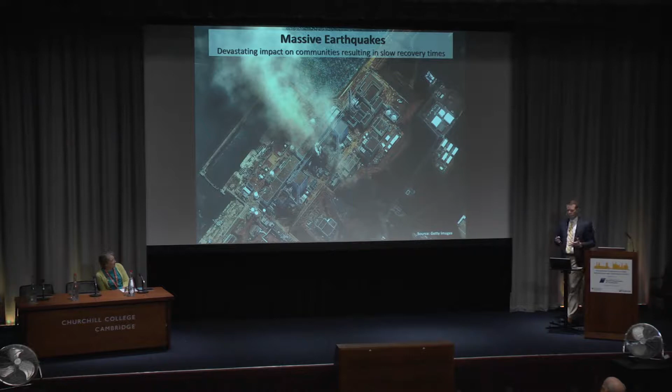We've seen a number of very large-scale earthquakes across the globe leading to massive destruction. Shown here is an example of the Tohoku earthquake in 2011, a 9.0 earthquake that led to a number of cascading failures—earthquake followed by tsunami breaching seawalls, leading to damage to a critical nuclear power facility that left some nuclear material to radiate from that facility.

This destructive earthquake led to over $200 billion worth of damage to the Japanese economy, underscoring the need to be resilient against these type of hazards.

Another example of hazards are tropical storms. This is actually the largest, most natural hazard that we see posed to our habitat across the globe, especially in the United States. Shown here is an example from last hurricane season, 2018, Hurricane Michael, which was a Category 5 hurricane that struck the northern coast of Florida, leading to massive destruction, really underscoring the need to be resilient against these type of hazards.

In the case of natural hazards like hurricanes, we're seeing an increasing number of hurricanes as well as increasing intensity posing threat to our habitat. If we look at just last year's hurricane season, we saw 15 named storms, 8 large storms, and 2 very large storms with destructive power like Hurricane Michael.

Other examples that introduce questions around resiliency for our habitat are things like climate change. Climate change is occurring, whether it's human-induced or not—it is definitely occurring and is projected to have increased global warming of upwards of 10 Fahrenheit degrees by the end of next century. We're also seeing increasing rising sea levels projected to increase 1 to 4 feet by the end of the century, and we're seeing dramatic shift in the availability of water across the globe.

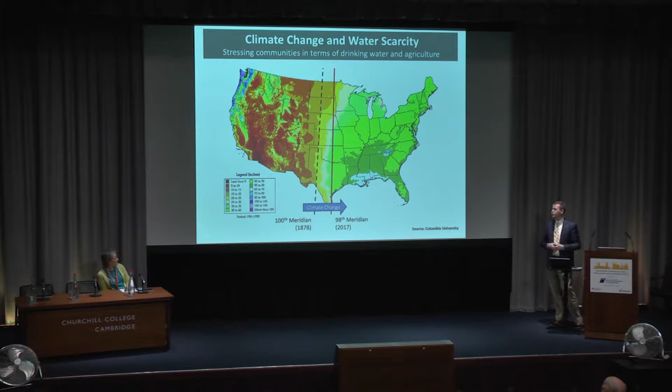But due to climate change since that time, that meridian's actually moved over about 140 miles. Today the demarcation in the United States is the 98th meridian, meaning that 140 miles across from north to south in the United States has had dramatic change in the availability of water, which has profound impact on our agricultural industries. Again, that introduces resiliency concerns for our infrastructure, our food supply, as well as our water availability.

Other types of concerns associated with resiliency is our rapid urbanization across the globe. We're seeing, for example, a massive wave of urbanization that's led to now more than 50% of the world's population living in very large cities.

We have a large number of megacities of 10 million or more residents within a very confined area, increasing essentially the stakes when hazards occur because of the complexity of addressing natural hazards and man-made hazards in such dense urban areas. Another challenge associated with urbanization is the resiliency of our infrastructure.

In many mature economies, we're able to plan ahead and plan accordingly to be resilient against stressors. But in many emerging economies, we see that there's waves of chaotic growth that introduce a lot of vulnerabilities in their infrastructure and the ability to withstand stressors.

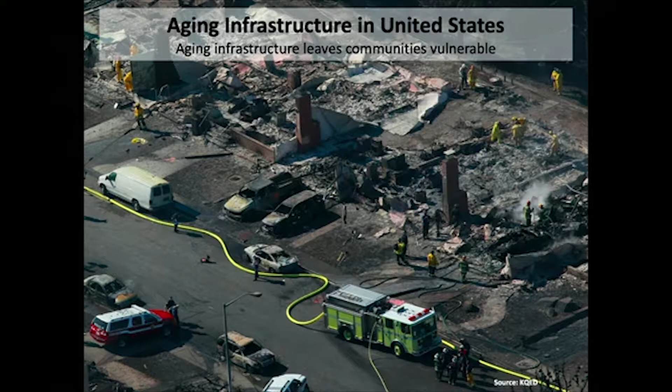Another challenge that introduces vulnerability in our infrastructure is aging infrastructure. For example, in the United States, most of our infrastructure was developed after World War II and is now approaching the end of their intended design lives. When we have essentially aging infrastructure, we have deterioration that can introduce weaknesses in those infrastructure.

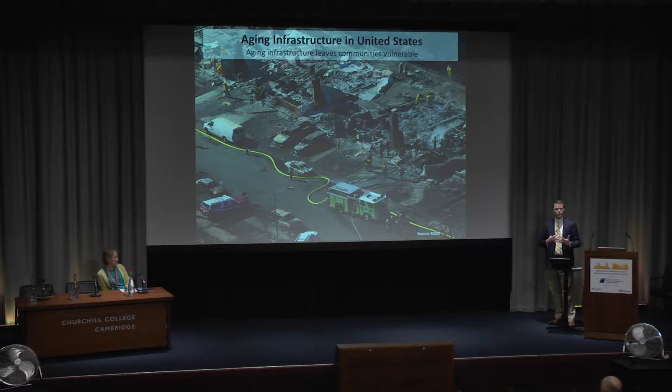An example shown here is the San Bruno pipeline gas failure, which occurred in 2010 in the San Francisco Bay Area. It was essentially undetected corrosion of a pressurized gas pipeline, leading to an explosion that destroyed a neighborhood in the San Francisco Bay Area, resulting in 8 fatalities. This introduces the risks that are evident when we don't address our aging infrastructure.

Other stressors can also be economic downturns. This is a big issue in the United States, particularly in the Midwest, where I come from, where we've seen a very dramatic change in the economic makeup of our local economies. We've shifted from essentially a manufacturing-based economy to one that is not, and that unfortunately has left a lot of people without available employment opportunities, leading to things like shrinking cities.

Now, when we think about resiliency, we can look at the definition of resiliency. For example, if I look at the dictionary, the definition of resiliency is the capacity to recover quickly from difficulties, toughness, essentially.

Now, from an engineering perspective, we often like to use functionality resilience curves to define and quantify our resiliency of our infrastructure. That particular performance curve typically is a time-based performance curve that's looking at performance before and after a disruptor event. So before the event, we may have normal performance. We have a disruptive event that can erode some performance metric that defines how our infrastructure is performing.

Over time, we can start to build back the capability of that infrastructure, leading to a recovery effort. That recovery effort can be delineated both short-term as well as long-term until we achieve full performance back after that particular event.

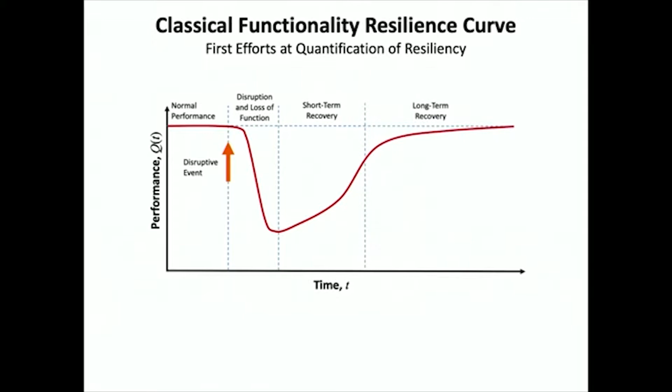Now, from an engineering perspective, we often like to look at the area that's underneath the curve off of essentially the normal performance level of 1. We typically will integrate that performance index, or 1 minus that performance curve, over the time period from the disruptor event to full recovery. That scalar is the way that we typically, or historically, would define resiliency.

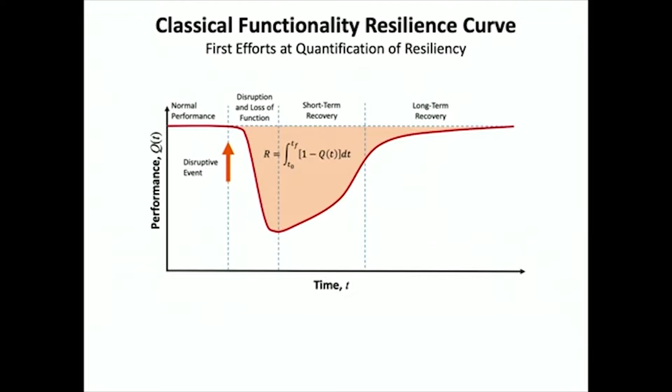But this particular approach to defining resiliency is potentially an oversimplification of a lot of competing and different dimensionalities that go into resiliency.

A broader definition of resiliency has been introduced by the National Infrastructure Advisory Council, which is an advisory council to the President of the United States, and is essentially congregated by the Department of Homeland Security. They define resilience along what they call 4 properties of resilience, and that includes robustness, rapidity, redundancy, and resourcefulness.

These 4 properties of resilience can be mapped onto 4 dimensions associated with resilience, ranging from technical, organizational, social, and economic. And they also explore the results of resilience.

Once we think about resilience among these 4 R's and in these 4 dimensions, what are the results? That can be more reliability of our systems, whether they're physical systems or human systems, lower consequences of stressor events, and faster recovery time periods, which is really the long-term aim of being resilient, is to be able to recover more quickly.

Now, if we think about the 4 dimensions of resilience - technical, organizational, social, and economic - as well as the 4 properties of resilience, which is a way that we can begin to objectify measures of resiliency, we see tremendous opportunity for smart city technologies that can come in and provide the data and information necessary to drive these type of analyses.

So by broadening the definition of resilience and looking at different dimensions and different properties of resiliency, we can more richly define what resilience is for our society and think about community resiliency along these dimensions and the appropriate approaches to sensing and actuating our infrastructure and societal systems to be more resilient along these properties and dimensions.

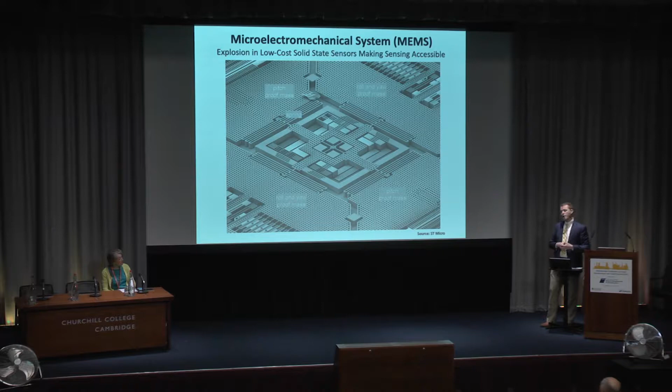We've also seen, from the 1960s to the modern day, a revolution in sensing technologies born out of technologies like MEMS, micro-electromechanical systems, where we've used integrated circuit technologies to build sensors. The benefit is that we can build sensors using batch fabrication methods, driving down their cost and size to miniaturized levels. Shown here is a MEMS-based accelerometer, a mainstay sensor technology today within the infrastructure space.

We've also seen, due to the emergence of technologies like CCD, a proliferation of cameras in our society. This is actually one of the most widely distributed sensors within the built environment. For example, here in the United Kingdom, it's one of the largest distributed closed-circuit television networks in the world, with nearly 500,000 cameras in the London metropolitan area. In cities like New York City, we have over 15,000 CCTV cameras distributed throughout the city, providing true big data—massive amounts of data that's very rich in both context and availability over time.

The last technology that's converged, really changing the availability of sensing and actuation solutions for infrastructure, is the internet, one of the greatest technological achievements of the 20th century, because it's opened unprecedented connectivity across the globe between people, between machines, and between information brokers and information consumers.

Now, if we converge many of those technologies, we see the ability to apply them to drive resiliency in our infrastructure. One of the first examples of adopting sensing and actuation technologies to make infrastructure more resilient is the introduction of monitoring systems as well as control systems. There are many examples of this coming from the mid-1980s all the way to the modern day.

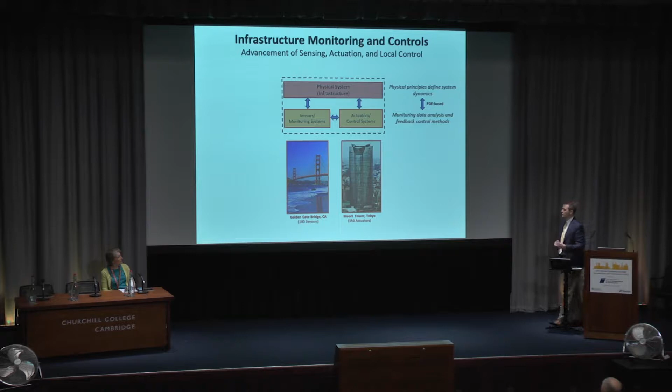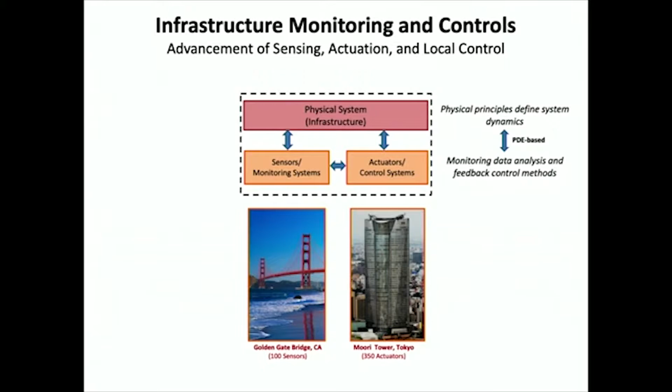We can also embed actuators in our infrastructure to allow it to react to stressors like earthquakes. An example would be the Mori Tower in Tokyo. This impressive structure in Roppongi has over 350 semi-hydraulic actuators—semi-active devices intended to limit deflections of the structure during typhoon winds, as well as small to moderate earthquakes.

Many of these different systems, whether monitoring or control systems, have largely been driven using physics-based approaches to our analysis, both in how we're interpreting the data collected and in the control laws being applied. These are largely partial differential equation approaches to using our data to understand performance as well as control.

More recently, because of the availability of the internet, we've seen a dramatic shift in our approaches to monitoring and control, best encapsulated through the emergence of what are called cyber-physical systems. Cyber-physical systems are distinctly different from structural monitoring and control systems because of the internet and the availability of computing power, which gives us scalable, on-demand computing capabilities, driving the adoption of new types of approaches to interpreting our data.

This goes beyond differential equation-based physical methods to ones that are more data-driven, based on concepts like machine learning, among other approaches that give us the ability to process large tracts of data. We then use the interpretation of that data from our cloud-based analytics to drive our control solutions—whether through reconfiguration of the control system or a completely new control law dropped in based on the computing capabilities available in the cloud.

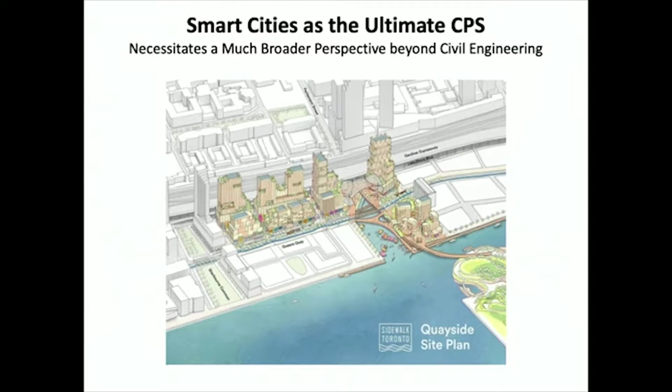The reason I like their particular approach to viewing smart cities is due to their interpretation of smart city services being layered on different functional layers. The layer we're perhaps most familiar with as civil engineers is the physical layer, which includes critical infrastructure systems like water delivery and energy systems, as well as buildings and built infrastructure we depend upon for our habitat.

We can introduce data and information through sensing and actuation technologies that drive the smartness of smart cities. That's something we've been exploring for many decades within our profession, whether through traditional monitoring and control systems or cyber-physical systems.

But really, smart cities go one step further, and it's the two other layers that I think are most interesting and important to highlight. One is an understanding of the resource flows that layer on top of our infrastructure systems. That could be energy, resources like nutrients, or things like finance—how money flows into projects, and how money is used as an actuation element to drive smart city development.

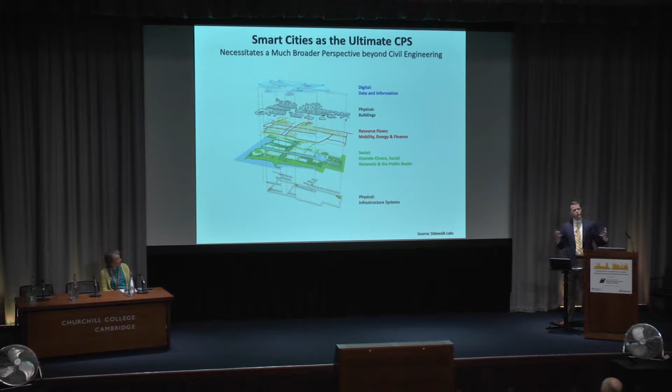The other layer is the social layer, ranging from the discrete choices of individuals within their society, to how individuals interact through social networks, to how individuals react and exist within the public realm. It's actually these two other layers that are the most critical aspects of smart cities, and they really push the limits of cyber-physical systems to go beyond just the physical to the social—so cyber-physical social systems.

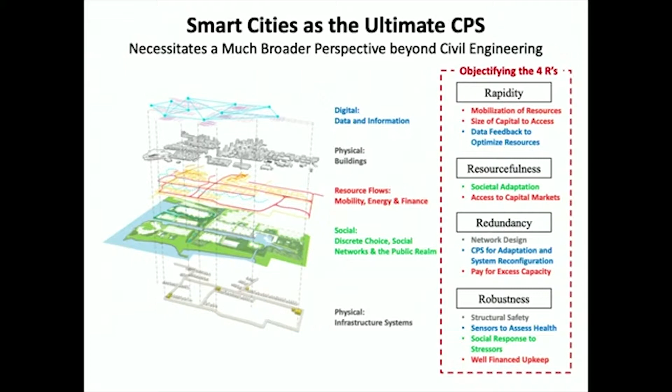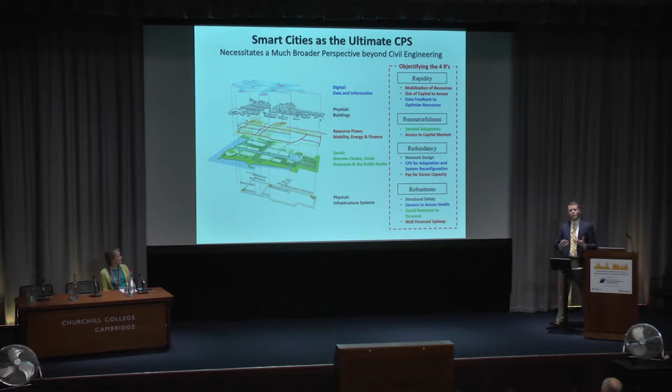If we think back to the four properties of resiliency I introduced from the National Advisory Board on Infrastructure—rapidity, resourcefulness, redundancy, and robustness—we see mappings of those layers as inputs associated with these four properties. We can think about robustness and redundancy, which often entail physical parameters, but also how we're monitoring, controlling, and financing those systems, along with social responses. When you think about resourcefulness and rapidity, we're thinking more about the social and resource flows necessary immediately after or before disasters to drive resiliency within our smart cities.

At the University of Michigan, we're exploring opportunities in the smart city space through a number of interrelated vehicles. Within our department, we've been looking at smart cities and cyber-physical systems as a mainstay technology for civil engineering, and we've been modifying our curriculum and research portfolio to be one of the driving forces in this space. We feel this is critical for the profession because we're beginning to see many other engineering disciplines coming in to define that space.

But we are uniquely qualified because we're a profession about the common good, and we want to leverage our experiences to really drive development within the smart city space. We're trying to do that through our education programs, and we also established an institute that cuts across our entire campus called the Urban Collaboratory, a forward-looking multidisciplinary research institute that works directly with cities.

So we essentially use what's called a city as a client model, where we go in and talk to cities and city stakeholders to identify challenges, then map those back as research problems that our researchers at the University of Michigan can help us solve and implement sustainable long-term solutions for those stakeholders.

The other center that we have is the Center for Smart Infrastructure Finance. The director is here today, Peter Adriaens. This center is really looking fundamentally to answer the question: who's going to pay for all this? I think that's a very important question that often gets overlooked, and it's really the distinct advantage we have as civil engineers to answer that question.

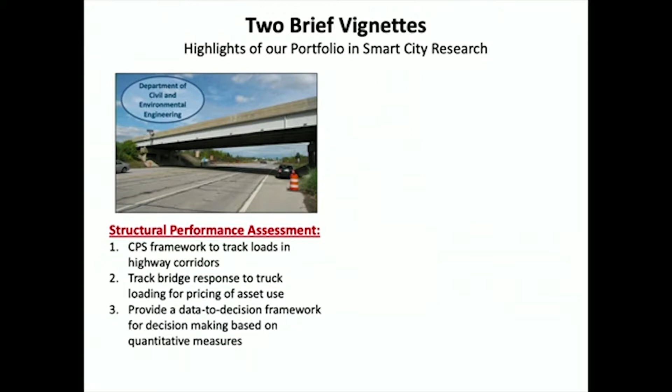The other example I'll highlight in today's presentation is the use of essentially looking at social systems within cities, and trying to democratize smart city sensing for populations that essentially want to monitor and understand some of the challenges they see in their community.

So let me begin with our first project. This project deploys a cyber-physical system on a 20-mile corridor we've instrumented close to our university in southeast Michigan: the I-275 corridor, which goes from the Ohio-Michigan border down by Toledo all the way up to the Detroit Metropolitan Airport. We have 4 bridges along that corridor carrying highway traffic, as well as cameras and a weigh-in-motion station. Today I'll largely focus on 2 of those bridges: the Telegraph Road Bridge, instrumented since 2010, and the Newburg Road Bridge, instrumented since 2016.

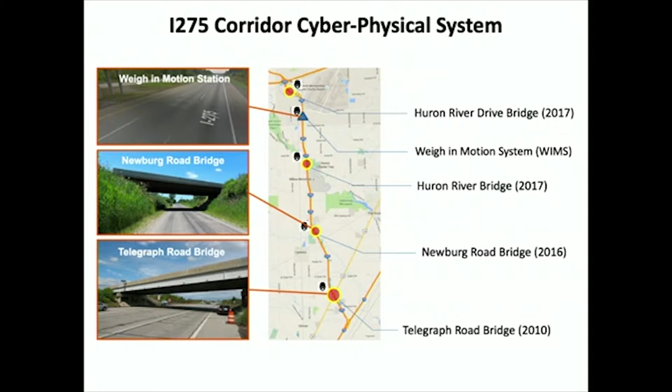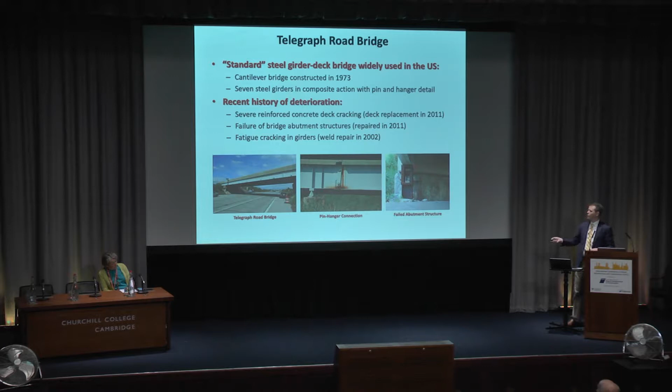The first bridge we instrumented is the Telegraph Road Bridge, a very traditional type of bridge seen in the United States—essentially a steel girder with a concrete deck on top. One unique structural characteristic of this structure is what's called a pin hanger connection, essentially a connection that moves the expansion joint away from the bearing, transferring the main span's loads off to wing spans that are supported in a cantilevered way by a pier structure.

This is a 40-year-old structure that has some deterioration quite common for a structure of that age, and it's being proactively addressed by the Michigan Department of Transportation. You'll see, for example, distress on an abutment structure leading to temporary shoring action on one of the steel girders, which has since been fixed.

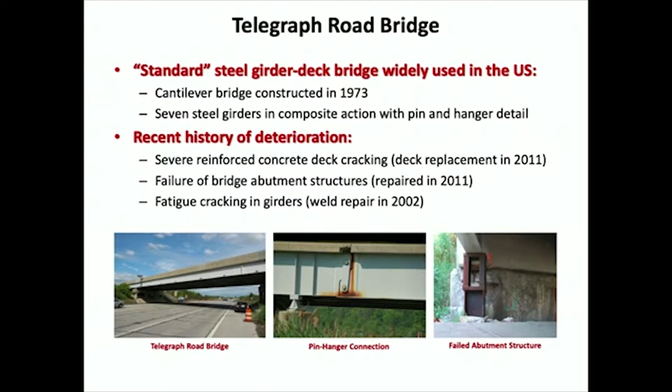We deployed in 2011 a network of wireless sensors that we developed in my laboratory over the years, called the Narada sensor node. It collects over 70 channels of data—not because we need all 70, but because it's a research project for us, and we're looking at different ways of processing data. So we have different types of sensors on that structure, looking at different response parameters, ranging from the vibration of the structure to its strain response.

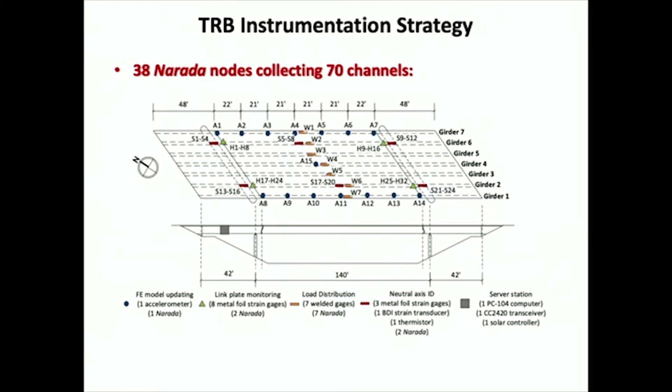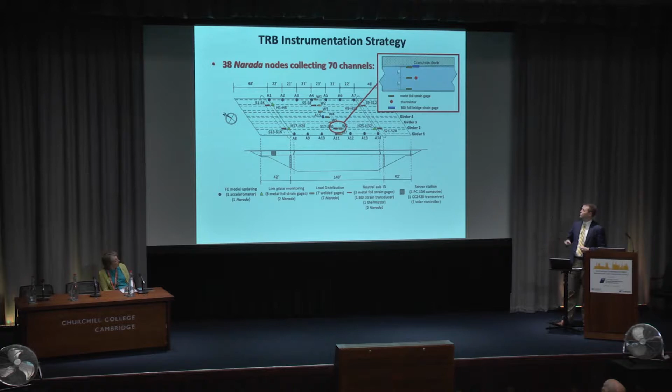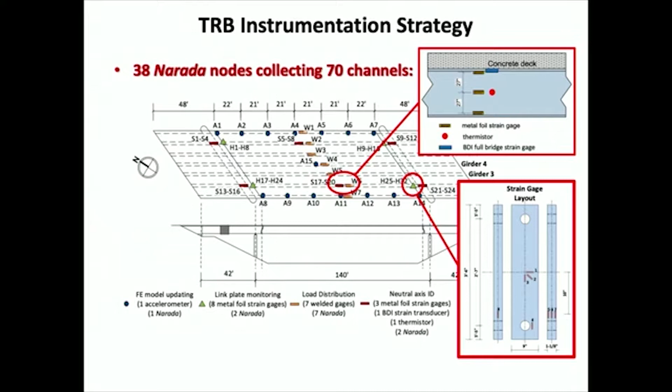For example, in our strain analysis, we look at the strain profile under flexural response of the structure using strain gauges and BDI bridge intelliducers that measure strain in the concrete of the deck. We also have pin hangers, one of the structural details of this bridge that's of primary concern to the owner, and we have a dense array of strain gauges on that particular hanger plate.

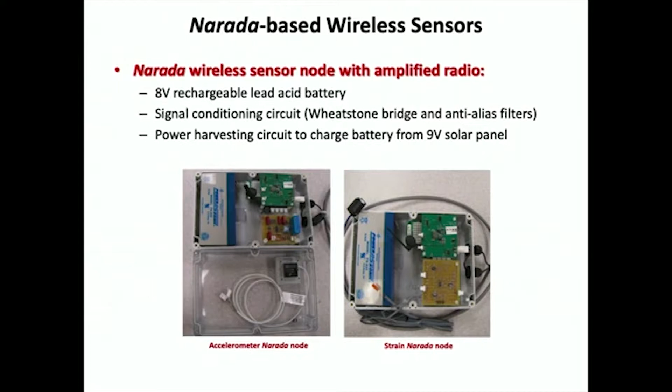Shown here is our deployed system. Again, we're using this Narada sensor node that we developed in 2005, but it maintains itself as a workhorse for the type of work I do in the field. This is just some evidence of how we essentially would deploy that particular system.

It's more than just a wireless sensor. It includes the ability to use solar power to essentially collect power and recharge batteries like lead-acid batteries, which are necessary for the type of climates that we work in Michigan. We have things such as shut-off circuits that essentially allow us to be very power efficient, so we're not constantly powering our sensors. We only power them when we need it, as well as signal conditioning board and different types of sensing transducers, including accelerometers and strain gauges.

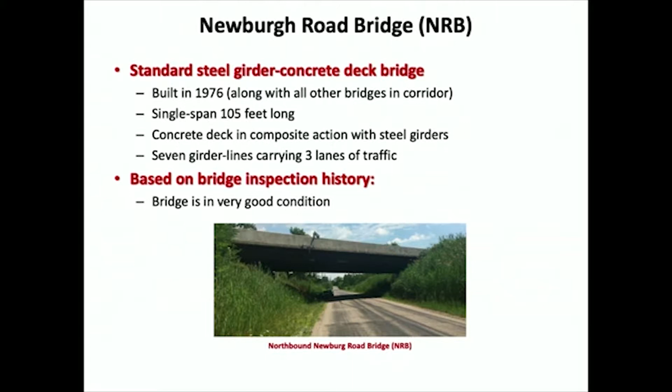The other bridge that we instrument is the Newburg Road Bridge, which is just a few miles north of the Telegraph Road Bridge. Again, very similar history to this particular structure. It's nearly 40 years old, a few years younger than the Telegraph Road Bridge. It does not have pin and hanger connections. It's a very standard single-span bridge structure. And we have a lighter array of 10 sensing channels on this particular structure that was deployed in 2016.

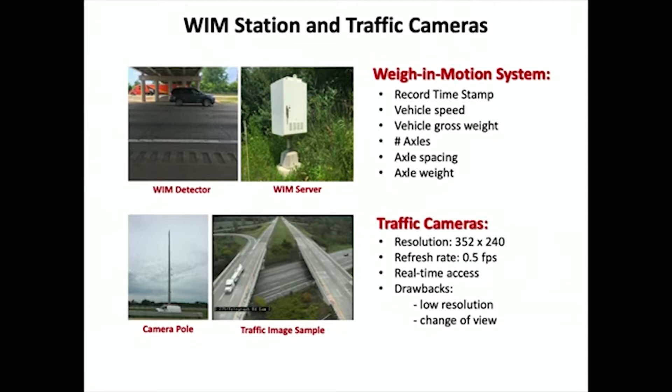In addition to our bridge monitoring systems, we have a weigh-in-motion station on that particular corridor that measures a number of parameters associated with the weightage of trucks that are going to be driving over those bridges. And we also have traffic cameras. You can see an example of the Michigan Department of Transportation's traffic cameras, but we've deployed our own that essentially have an embedded GPU that will allow us to do analytics directly at the point of data collection.

In this case, we're using a webcam that's going to monitor road traffic driving over our particular structures, and we'll embed detectors that allow us to detect real-time trucks as they're driving over our bridges and our weigh-in-motion station. Shown here are just some of the examples of the system deployed. Again, it's a solar-powered system, both our base station, which uses cellular communication to move data to the cloud, as well as our wireless sensor nodes, which are essentially using Zigbee protocols to move data to that base station, and then the corresponding camera system that's on the roadside of that particular structure.

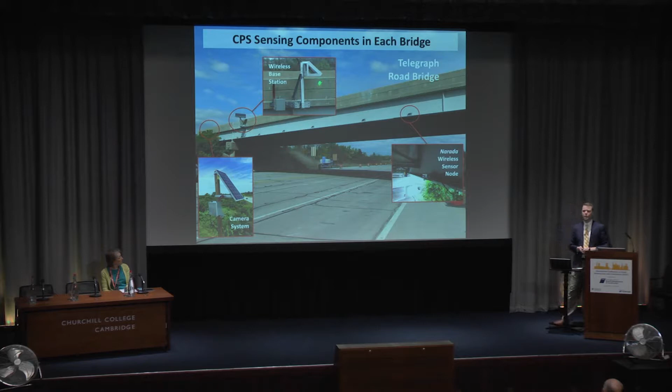And we have a camera at all of our bridges, as well as the weigh-in-motion station. We have one camera that's actually south of the system that's going to be a trigger to trigger our monitoring system. Once we collect that data, we'll push that data to the cloud.

So we've been collaborating with Professor Kincho Law's group at Stanford, who does a lot of work in engineering informatics and data models associated with how we store data. Once we collect our data at our sensor networks and our traffic data from our cameras, we move it to a cloud database that essentially is a NoSQL type database, giving us flexibility in the representation of that data within the database. So we're using Cassandra to essentially store that data, as well as to combine it with information associated with the structure using bridge information models, which is essentially a BIM type model that's specific to bridges and represents elements for bridges.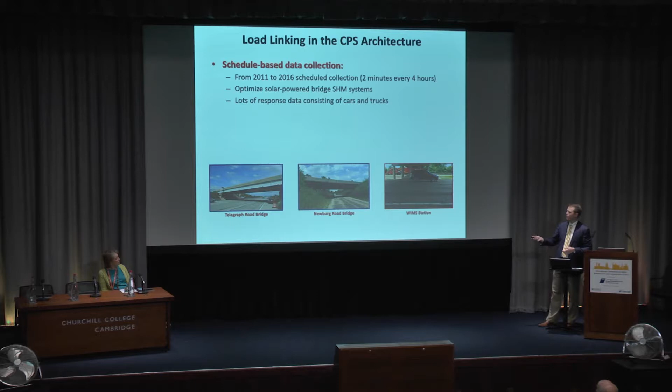Now, what we're interested in with the cyberphysical system is fundamentally to link loads to the bridges. So what we're trying to do is measure the response, or essentially the weight of trucks and cars that are in the corridor, to the structural responses we're measuring at our bridges. So we have our Telegraph Road Bridge and our Newburg Road Bridge. We're using detectors to detect trucks so that we can both trigger these systems but also to link loads. So we could look at correlation analyses of how one structure responds relative to another based on the identical load profile that we get by identification of the truck loads driving over our structures.

The way we do that is we have one camera that's right at the entry point of the northbound segment of I-275 that's essentially always on and is real-time detecting traffic load to detect trucks.

We're more interested in trucks because of the magnitude of load that they introduce within our bridges. So we have an embedded detector, embedded directly at the camera on a GPU, to detect trucks. Once that truck is detected, that trigger will signal the monitoring system, in this case the Telegraph Road Bridge, to collect data roughly 100 seconds after that trigger, assuming the truck is driving at 60 miles per hour.

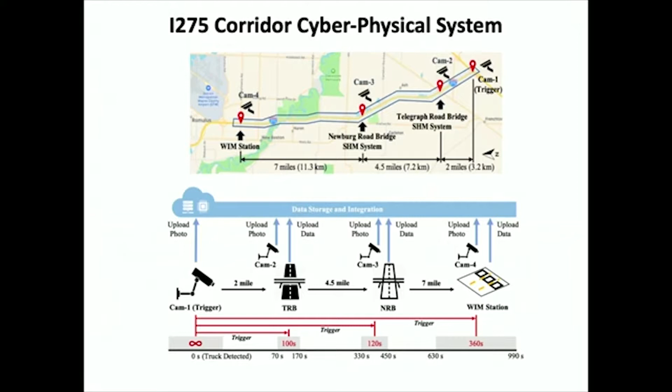We give it some margin so that if that speed is slower or faster, we're still able to collect data from that particular truck. This is a very efficient use of precious resources like solar energy, particularly in winter months where we don't have long sun exposure. As we're trying to recharge these sensors, we don't want them collecting data associated with small cars or when there's no vehicles present. So this trigger strategy allows us to be super efficient with the energy we're collecting through solar power, focusing on the response of these structures to truckloads specifically.

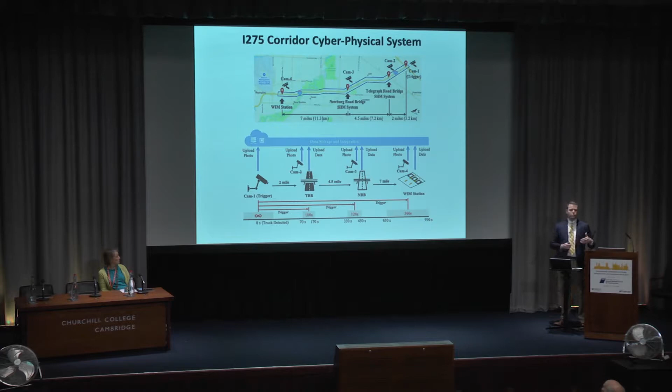Similarly, that trigger will also trigger the Newburg Road Bridge about 120 seconds after trigger, again with some margin for error. And then about 360 seconds later, when that truck should be arriving at the WIM station, we trigger that system again. That's going to give us bridge responses at these two bridges, a WIM reading at the WIM station, and the associated video imagery that's going to allow us to identify those trucks.

Now, to identify those trucks, we're going to use a neural network strategy, one of the emerging approaches within the computer vision area. We're using a single-stage convolutional neural network that allows us to execute at pretty high speed, giving us high performance with respect to identifying objects within the field of view. Again, what we're trying to do is identify these trucks.

So we're using one variant of a single-stage detector. In this case, we use YOLO by Redmon, introduced many years ago. YOLO stands for 'you only look once,' which is a convolutional neural network architecture well proven to be a good detector of objects, depending on how you train it against different object class types.

So we feed that imagery through a multi-layered convolutional neural network to extract bounding boxes that have some probabilistic measure of the detection of classes. We're training these convolutional neural networks against three class types: trucks, pickup trucks, and cars. And we want to be able to detect these in real time, particularly for our triggering action.

So we're using version 3 of YOLO, YOLO v3, introduced by Redmon in 2018. We use the full-fledged YOLO v3 in an offline detection mode. We're collecting imagery at all these different bridges and WIM stations, and those don't need to be processed in real time. So we use a regular YOLO detector for that.

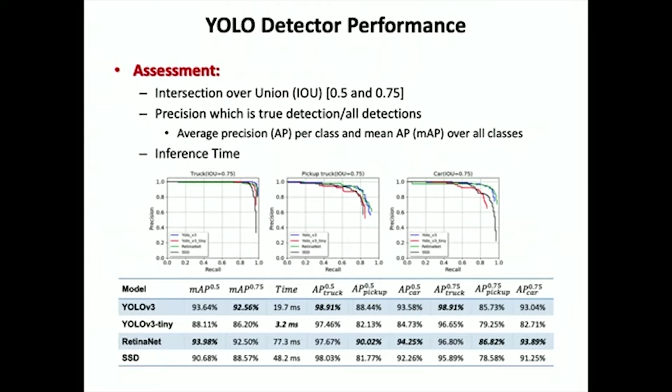You can see some of our receiver operating type curves, our precision-recall curves, showing the different performance features of the different detectors compared against other single-stage detectors like RetinaNet. Shown here is actually some of the results that we get for that system.

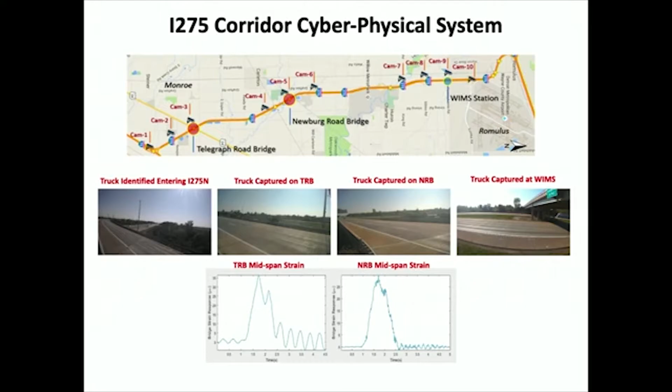So we'll capture a truck. That truck is essentially going to trigger the monitoring system up at the Telegraph Road Bridge, where we're synchronized in our imagery collection as well as our bridge response. So you see the strain response there. Now that same truck comes up at our Newburg Road Bridge. And then finally, we're going to see that truck up at the WIM station, where we're able to get a direct measure of the vehicle gross weight, the axles, as well as the distribution of weight on the different axles.

Now, a challenge here is not just detecting trucks, but being able to what we call re-identify trucks, being able to say the truck we saw at one bridge is the same truck we saw at the next bridge. And that's called re-identification in the computer vision world.

We're using essentially a triplet network architecture to give us the ability to take imagery from the different points of data collection to identify that same truck as it's traversing through our cyberphysical system. It's based on essentially a triplet loss function with a defined margin. And we're using the YOLO version 3 tiny implementation as the embedding network.

So these three networks have the same weights, and they're being fed an anchor image, a positive, which is a secondary image of the same vehicle, and then a negative, a different vehicle. We're training that through a backpropagation method to give us the ability to identify with high degrees of precision essentially the same vehicle at the different locations in the network.

Once we do that, what we fundamentally have at the end of the day is essentially bridge response data to the same truck load, as well as a direct quantitative measure of the actual load itself that's collected at the WIM station. That provides tremendous opportunity for us now to correlate bridge behavior to a direct quantitative measure of the weight of the truck. It may not be a measure of the actual dynamic load in the structure, but it's better than what we had before, where we would just typically deploy sensors and only get responses without direct measure of the truck load itself.

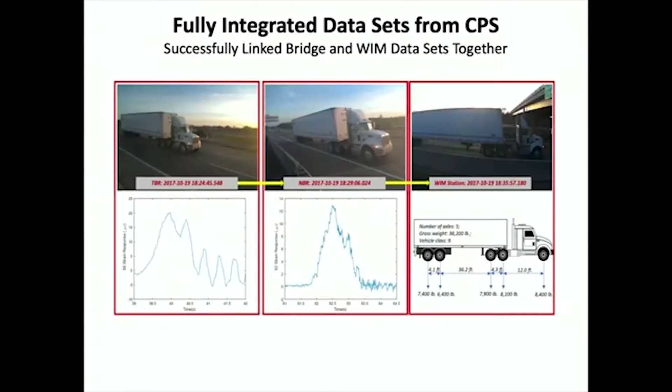Now, what we can use that data for are things like correlation analyses, looking at, for example, the peak bridge response against the measured vehicle weight. Depending on which lane that truck is in, this is 5,000 truck instances that we've collected over a one-year period with our cyberphysical system. You'll see a fairly linear behavior, as we would expect for these types of structures, against the gross vehicle weight. There's large scatter here because we're just using a very crude measure of the weight.

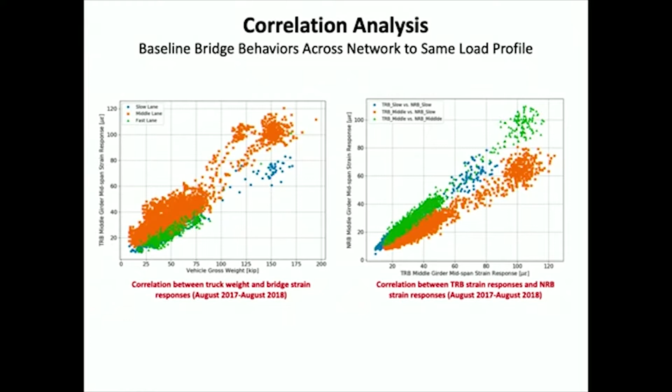We don't include the weight distribution, nor essentially the distribution of weight on the different axles. But where we see essentially less scatter is if we look at the relationship between the peak response of one bridge against the peak response of another bridge. We begin to see correlated analyses that may allow us to build relationships between bridge responses in the same network. And the reason we can do that is because each dot in the scatter plot corresponds to the same truckload being observed at the different points of data collection within that particular network.

Now, one of the things we're doing with the data is actually trying to aid the decision-making of the bridge manager or the asset manager. The current approach to decision-making by bridge managers is fundamentally based on visual inspection. It's a time-tested approach that has a very, very good track record for managing our assets.

So visual inspection includes a visual inspector that goes out and is looking at different bridge components and assigning a condition rating. In the United States, that's often on an FHWA scale of 1 to 9, 9 being a component in excellent condition, a 1 being in very poor condition.

Based on the condition rating assigned, these departments of transportation have very well-established decision-making processes that are triggered based on condition ratings. And that's very important, because what we're trying to do with our bridge monitoring systems is drive decisions. So we have to embed our monitoring system within that decision framework that exists, which today is based on condition ratings. Now, in the structural health monitoring field, we think about deploying sensors, analyzing that data in some form of an assessment, and then trying to use the output of our structural health monitoring algorithms essentially to do the same thing as visual inspections, which is manage structural safety at a defined cost.

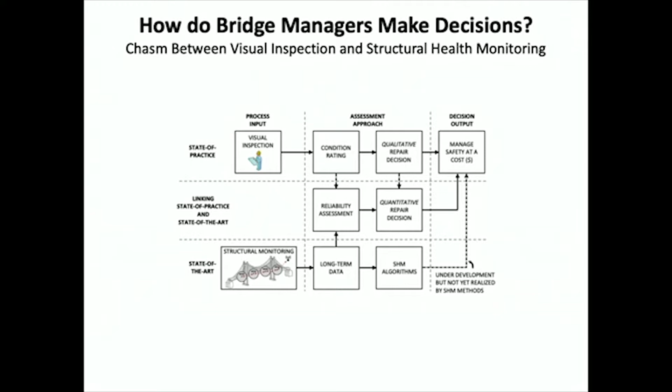But we're doing so complementary to the visual inspection process, which is largely driven by condition ratings. So the challenge for our research is to combine condition ratings with a reliability assessment. If we can do that, we can process our data, correlate it to condition ratings, and then use established existing decision-making processes that many DOTs already use based on condition ratings.

To do that, we're essentially looking at the performance of the structure largely in its elastic regime. That's one of the challenges structural health monitoring algorithms have had - they largely think about damage as introducing distinct changes outside of the elastic regime. That's one of the reasons those methods have been very challenged in their ability to be applied to real structures like bridges. So here we're essentially looking at what the performance of the structure is, given the structure exists for most of its lifetime in that elastic regime.

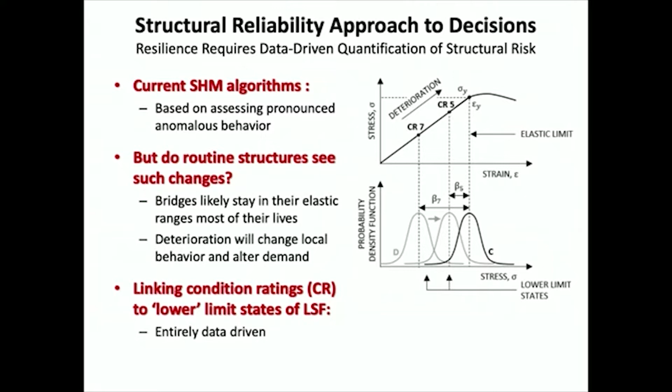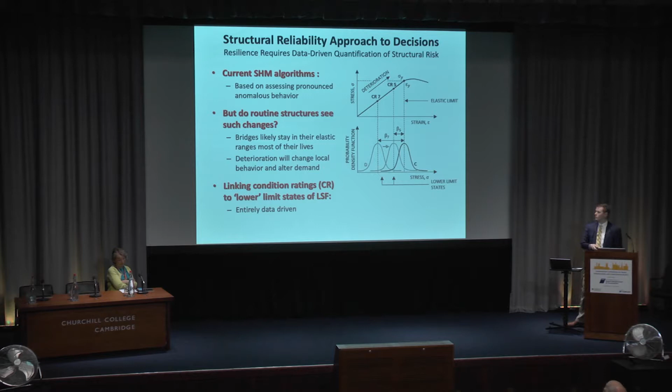We can do that by looking at the demand capacity, a very traditional approach in the reliability field, and trying to describe that in a probabilistic way through, for example, a scalar such as the reliability index, or beta. So what we'll be doing is linking these betas, which we can empirically derive from the monitoring data we collect, to the condition ratings. We can think about condition ratings as essentially an increase in demand on the structure due to deterioration. I'll show some examples of that from our Telegraph Road Bridge.

The particular area I want to focus on is those hanger plates. These are structural details that are no longer permitted to be used in the United States due to the Mianus River Bridge failure in the early 1980s in Connecticut, where essentially there was rust and deterioration on the plate behind that pushed the plate, walking it off its pin, leading to a shearing on the corner of the pin and a brittle failure mechanism of that bridge. So they're not really used anymore.

Now, this plate will continue to operate in its elastic regime, but it's seeing increasing demand because it's losing area as it ages. That's a classic example of what we mean by a component that's going to behave elastically, but we're trying to identify damage - in this case, the deterioration of its section.

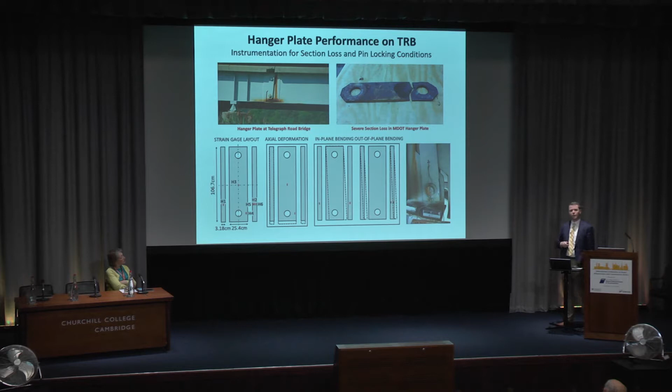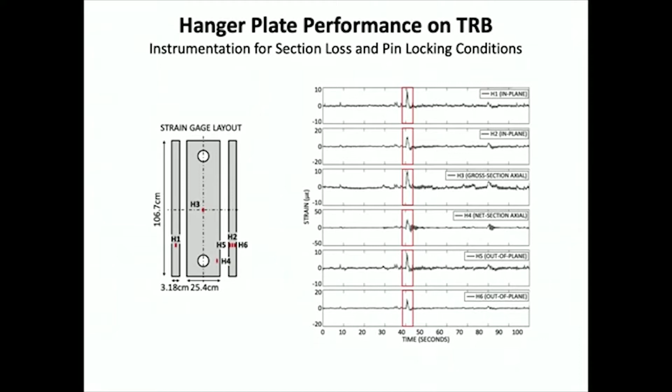What you'll see is that this particular plate is not behaving in the classical way it's interpreted from a design perspective, which is that it's designed to act like a purely axial element. But it's actually not - and the reason is you'll see in-plane and out-of-plane bending being developed in that plate. That has to do with friction and corrosion developing between the pin and the plate. It's locking it, leading to in-plane and out-of-plane moments that the designer is not accounting for within the design process, or at least not accounting for explicitly.

And you can see, for example, differences in that in-plane strain that's associated with those moments in that particular plate, from the data we collect.

It has no deficiency, but if you start to see minor section loss, you go down to a 5. If you have 10% section loss, a direct quantitative measure of deterioration, you go down to a 4. At 25% section loss, you go to a 3, and so on.

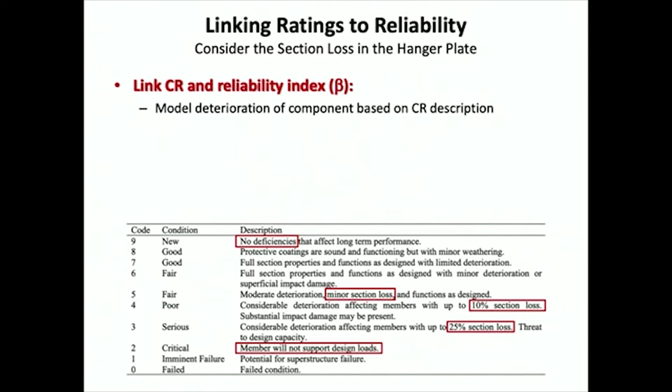This is the necessary clue required to establish a direct linkage between a reliability index and our condition ratings. So the way we're going to do it is model these different lower limit states, if you will, from a reliability standpoint in a modeling framework to establish what are the associated betas with each of these deteriorated conditions within our structural element.

We'll be looking at 2 limit states in this particular example. The first is essentially yielding due to axial load in the net section, down by the pin, as well as pin torsional yielding. These are 2 measurable limit states, meaning we have data that can be used to input into many of the live load parameters associated with these limit states.

So we develop a finite element model that takes those different deteriorations associated with the different condition ratings and applies them to our model. In this case, it will be section loss as well as friction along that pin hanger plate surface, and we perform a first order reliability method to establish beta.

And that's what you see here: section loss versus interface friction. What is the associated beta for each of these conditions? Because in the case of section loss, I essentially have condition ratings I can now link to, because of the established quantitative measure associated with some of those condition ratings.

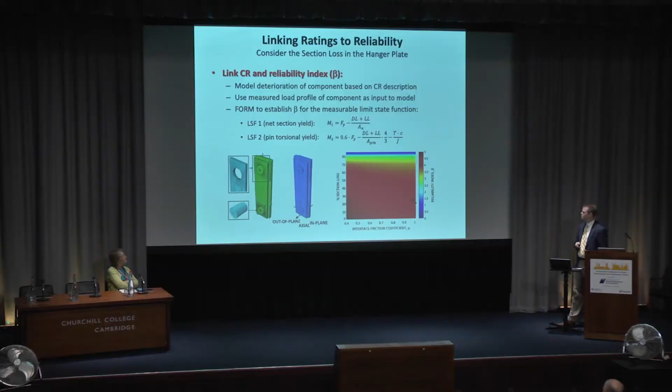So in the case of the first limit state, we're interested in essentially yield from the dead load and live load that's axial to that plate. But we can measure parameters like the live load, which is essentially strain gauge 4 down at that net section. How about that area? How are we going to measure the area?

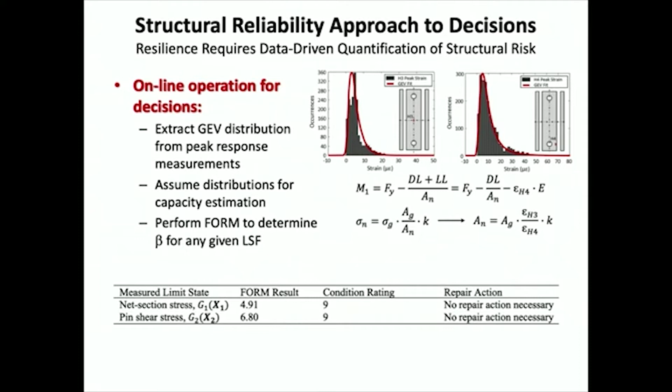Because again, it's section loss that we're losing there. Well, if we look at what the net stress is against the gross section stress, we see that's relatable to both the gross area up at the midsection versus the area at the net section. And we can see that relationship is actually measured in the ratio between the strain we measure at the center of the plate to the strain we measure down at the first pin.

And that provides the ability now to use these 2 strain gauges to feed this limit state function, to extract out that reliability index and then map that to our condition rating.

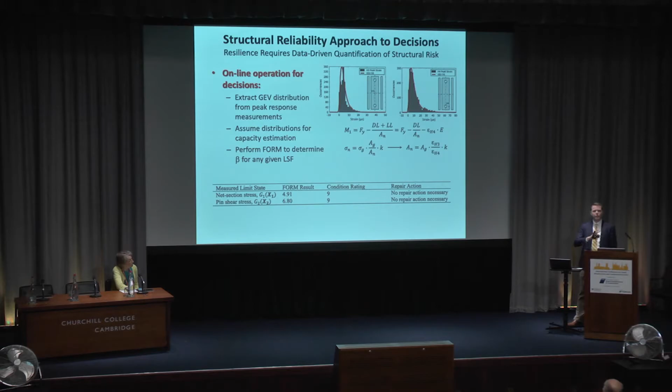So you'll see here from the actual structure, one of the hanger plates, we have very high reliability indices indicating a condition rating of 9, even though the bridge inspector is actually rating that as a 7. So that's a very exciting approach to taking structural monitoring data and moving it toward an established reliability framework, which again is understood by the structural owner, because most of them come from the design realm, to start making decisions based on condition.

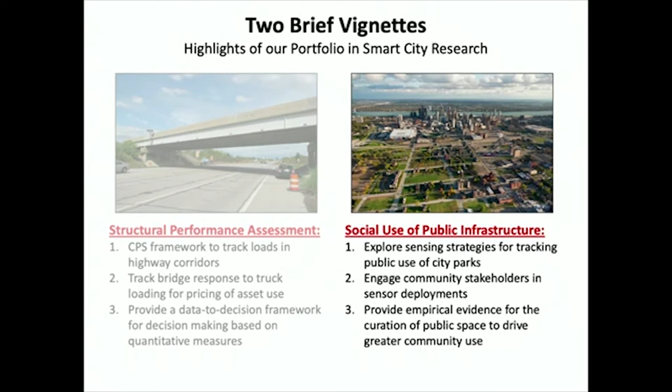So the last area that I want to highlight very quickly is an adaptation of some of these sensing technologies to monitor social systems within cities.

There's a lot of interest in urban sensor networks in the smart city realm for a number of different reasons. It allows us to provide data associated with the different urban processes we see within our built environment, whether they're physical, social, or what have you.

But today, if we look at urban sensing, these are approaches largely reliant on the government sector in collaboration with the private sector coming in, selecting the sensors, deciding what to sense and where to sense it, and putting it out, without a lot of good interaction with critical stakeholders like community members within these cities.

And that's going to challenge modes of governance within our cities because it's creating an asymmetry in the information available to different stakeholders. The political domain can take advantage of these sensors to provide better services that ultimately may help them stay in power. But community members often are not the direct beneficiaries of many of these urban sensor deployments, and that's a real challenge for the widespread acceptance of urban sensing within urban environments.

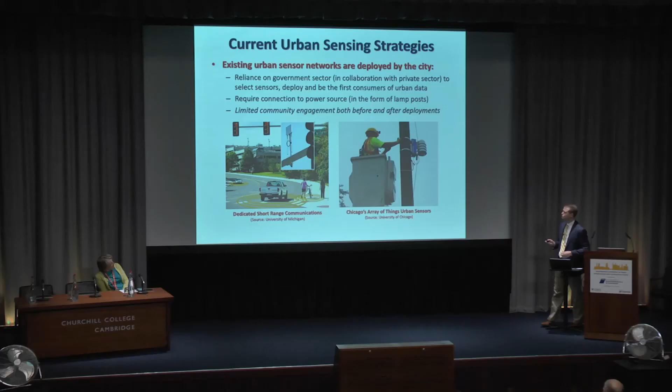Now, we have a project we call Sensors in a Shoebox, which is looking at deploying sensors not to the government sector, but essentially to communities, allowing communities to take these sensor platforms and deploy them themselves to collect data that they want to collect data about, things that they're interested in studying.

So we have a very simple to use sensor network system that you essentially give to a community member, they turn it on. It has a number of different modalities that can be plugged into it, and community members can collect that data. It uses solar power, so we don't have to tie into dedicated power systems like you do in most urban sensor networks. It also uses cellular communication so we don't have to tie into things like fiber optic networks within cities, giving community members full power with their data collection capabilities.

That's essentially pushed to the cloud where data is visualized for community members to use and interpret. We have a number of different ways of providing that data, from portals to things like Twitter. We use Twitter, for example, to just tweet data right off of these sensors, giving the public the ability to subscribe to a Twitter feed associated with a sensor. That can be one way to use data beyond data portals we may put online, which can be cumbersome or difficult to use for some community members.

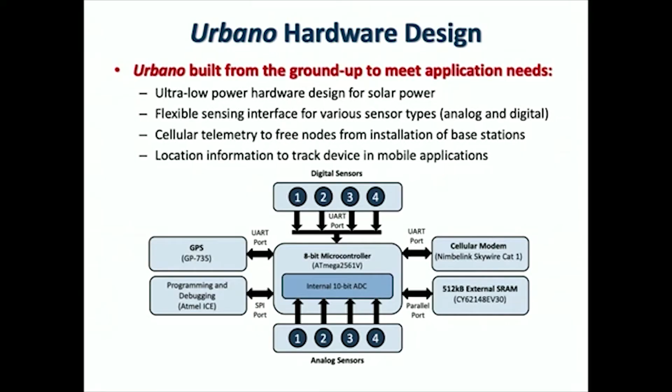Now, essentially, we're deploying these systems using a network platform we call Urbano. This is an open source platform, both hardware and software, for these urban sensing applications. It uses a very low power microprocessor. We have GPS capabilities for applications associated with tracking things in cities, as well as cellular modems. But these modems can be swapped out for things like LoRa modems or other types of telemetry methods we may see emerge in the smart city space.

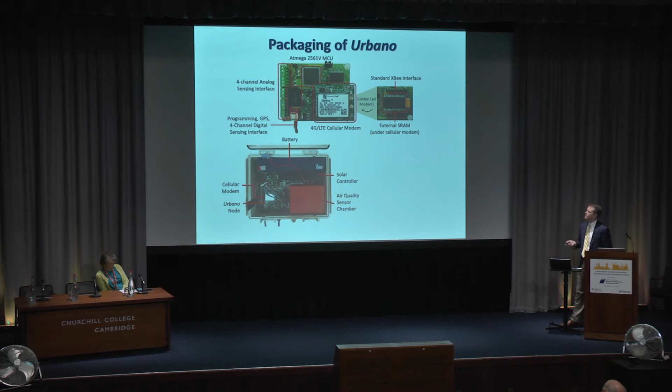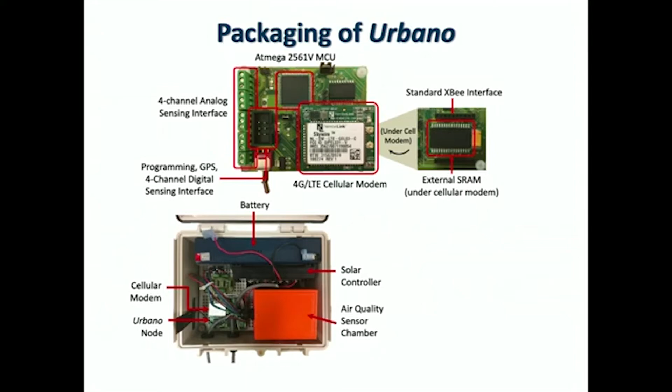Shown here is a picture of that Urbano, and you can see the cellular modem we embed on it. It's on a daughter-board configuration, so we can pop that off and put in different types of radios depending on the application. More recently, we've been deploying a lot of LoRa networks in Detroit based on this platform without cellular to save cost. We can connect data like air quality data or pedestrian counters through passive IR type sensors.

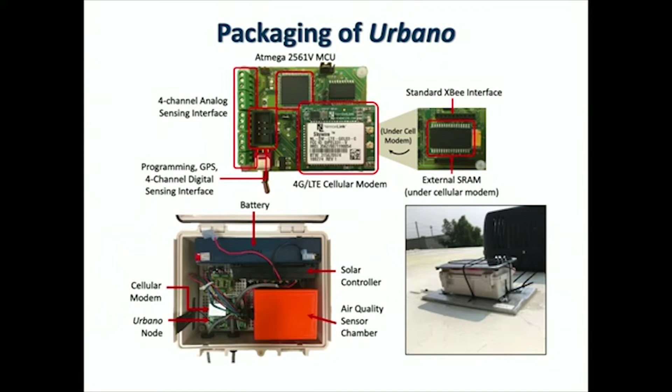This is an example of it, actually deployed in Grand Rapids where the city was interested in pricing the permitting of food trucks. Today, that city prices food trucks just based on per use, one truck, one cost. But the city is interested in looking at how much business a food truck is doing based on measures of actual customers coming to the truck, to start pricing food trucks differently based on location in the city, trying to monetize that curb space more efficiently. So that was one application we did for Urbano.

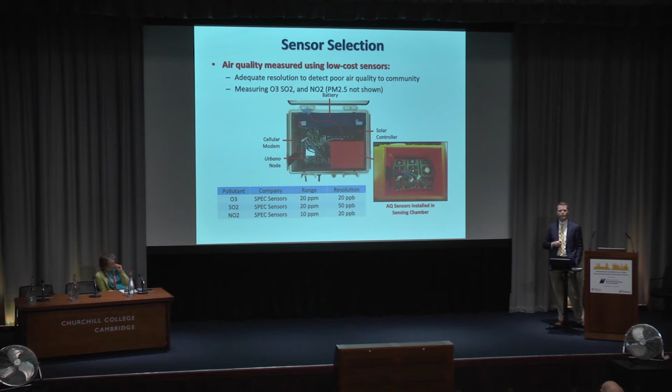The other applications we've looked at have largely been air quality applications, using low-cost air quality sensors looking at NO2 and SO2 pollutants, as well as ozone within urban environments.

Once we have that platform, we use a commercial cloud-based environment to actually move data to the cloud and use established visualization tools. We use a platform called Exosite One, which is relatively open for the user community to use. One advantage of moving data through that platform is that we have a variety of different ways of dispatching that information. Again, we do a lot of posting on websites as well as Twitter feeds of our data, and you'll see an example of some of the feeds we pull off that portal.

Now, we've been deploying these sensor networks in Detroit, which is roughly about a half hour from our campus at the University of Michigan.

Detroit is what we would call a shrinking city in the United States. As I said at the outset of the presentation, it's seen 60% population decline over 60 years. That had to do with a tectonic shift in the automotive sector. Detroit, being the motor city, was historically relying on manufacturing jobs.

There were mass waves of migration within the United States through the 1940s and 50s that moved populations from the South up to Detroit to essentially work in those factories. But as those factories disappeared, starting in the late 70s all the way up to modern day, we saw a dramatic population decline. This is an area of Detroit that at one time would have been a very prosperous, very populated neighborhood that today is largely unpopulated.

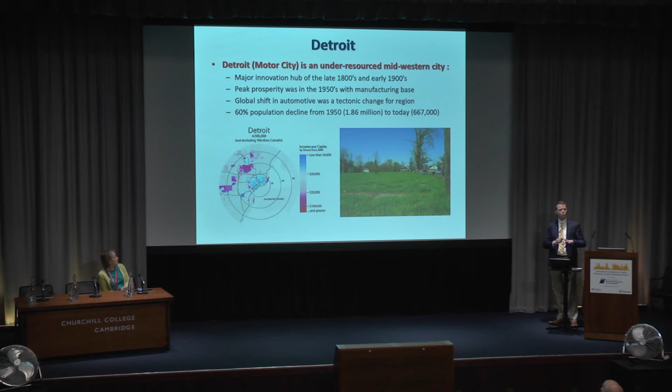So much so that the city has gone in and eradicated most of the vacant housing that's there. You'll see large swaths of urban space in Detroit that essentially have one house, and entire city blocks that are completely empty. That's one of the challenges, but it's also a symptom of essentially the encoded poverty that we see in that city.

Large segments of that city have incomes on a per capita level of $10,000 or less, which is incredibly far below the poverty line, meaning it's very difficult for that particular community to have social mobility within those spaces.

We've been working largely with adolescents in the city of Detroit, because adolescence is really the age group you want to target if you're trying to keep individuals in a city as they essentially are trying to socially mobilize.

We've been working largely with middle school and high school students through a variety of different partners in the city of Detroit, including some charter schools and some outreach organizations like the Detroit Hispanic Development Corporation, to implement our Sensors in a Shoebox program. Essentially, that particular program selects a select number of students.

You'll see some of my PhD students shown here, working directly with the students that we have in our cohort. We ask the students to first identify things that they're concerned about as community members within their community. You can see a list of some of the problems that they've identified through some of our working sessions.

One of them is pollution, that's something that we can measure, something we can actually collect data on. We teach the students three forms of data collection. Field observation - go out, visually look at some of the problems, quantify the problem based on visual observation.

The other is survey methods - start to talk to other members in your community, talk to some of the leaders of your community and get their perspective. And then collect data using our Sensors in a Shoebox platform.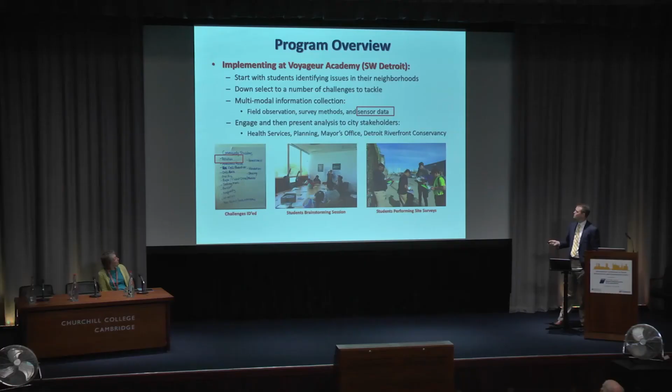The two things we've looked at with two different cohorts have been essentially green space. There's a push as the city revitalizes to make it what's called a walkable city. The city planner, Maurice Cox, who previously redeveloped New Orleans after Katrina, is now the city planner for Detroit, trying to implement urban planning solutions based on walkability of the city to strengthen community ties within the community.

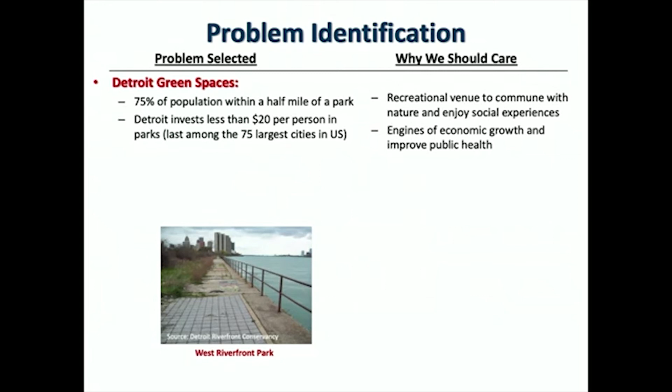So there we see a city that has tremendous park access, but is largely under-resourcing investments in the park. The city is fundamentally no longer curating those parks, no matter how critical they are to the prosperity of these neighborhoods.

Also air quality - particularly Southwest Detroit has two coal-fired power plants and also a large number of steel and aluminum mills that essentially introduce a lot of pollutants. It's an area that the EPA is monitoring with a dense network of air quality sensors themselves. But the problem is we see historically high levels of asthma among the youth that live in those areas due to those pollutants. That's why these are two areas of interest that these students have identified.

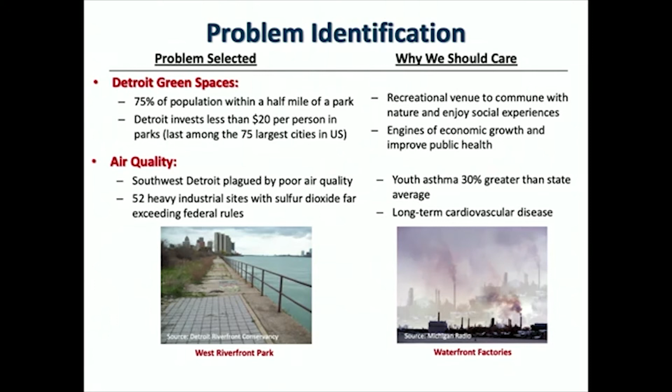Shown here is one area that we've used in the city. It's essentially one of the greatest assets of the city of Detroit, which is its waterfront. This is the United States, and to the south is Canada, essentially Windsor, Ontario. This waterfront is a large park that before, in the early 2000s, was essentially fallow land.

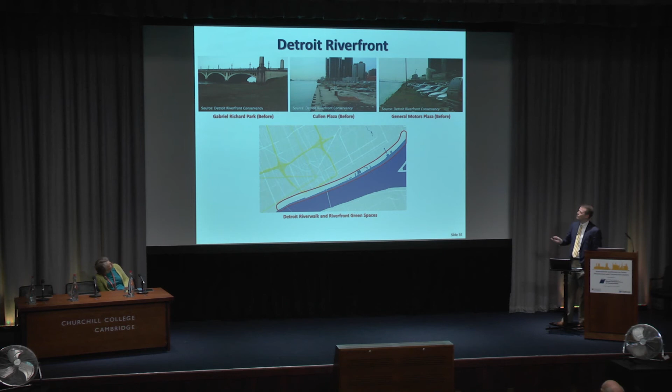You'll see here underdeveloped land, but if you look after 2003, massive investments - hundreds of millions of dollars of redevelopment money has gone in from foundations and industry. This is the Ren Center, General Motors headquarters.

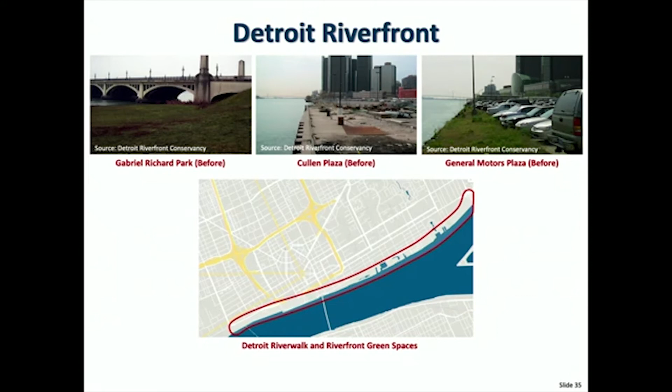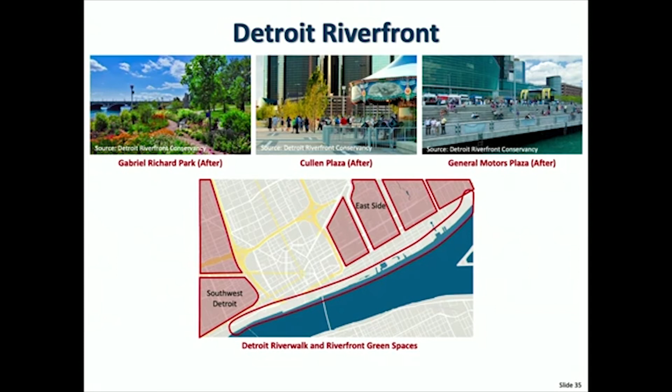They've contributed a significant amount to make it look like that today, so it's a beautiful asset of the city of Detroit. The challenge with this asset is community members find it difficult to gain access due to Jefferson Avenue, which cuts that park space off.

To address that issue, there's a number of cuts that have now converted old rail lines that serviced essentially an old port on the Port of Detroit. They've converted these old rail lines now into walkways. One of them is called the Dequindre Cut, a rail-to-trail initiative in the city.

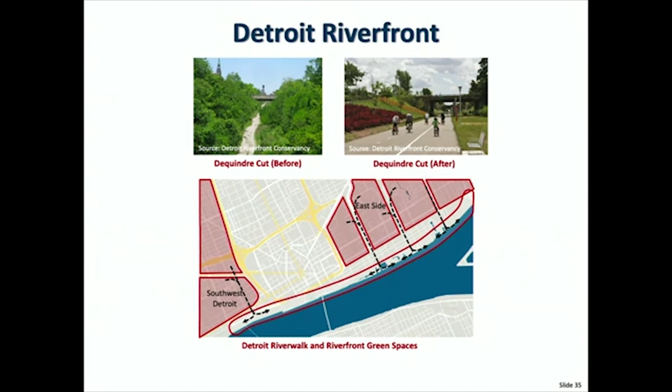This is what it looked like before, and this is what it is today. It's a beautiful part of downtown Detroit, coming off the riverfront up to an area called Eastern Market, shown here. But there's two more cuts, the Campau cut as well as the Beltline cut, that are about to begin redevelopment.

We've been working with the Riverfront Conservancy to essentially do pedestrian monitoring with our students. The students that we've embedded develop platforms that use passive IR to look at the number of pedestrians coming across these cuts, to provide quantitative empirical data to the park owner to curate these spaces and draw community to the waterfront.

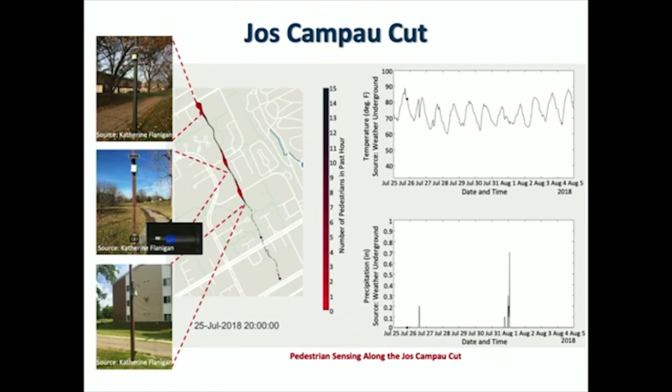That's very powerful, both for the students deploying these sensors to see the usage of these public spaces, and also for the owners of those spaces to curate them better.

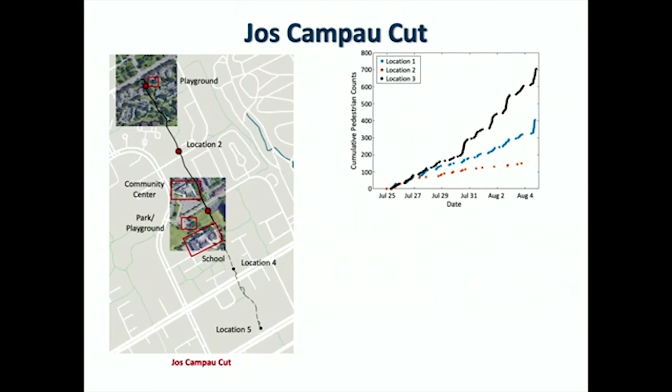For example, some of the things we've learned: we could look at cumulative pedestrian counts of those spaces and understand limitations in that space. We see high use around public areas, but an area that deploys sensor 4 doesn't even trigger. Why is that?

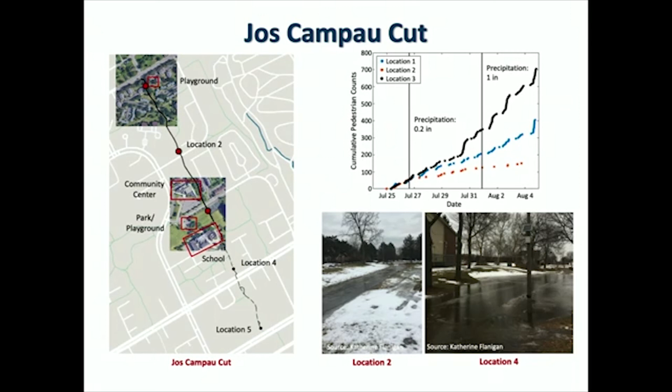It's largely due to obstructions in that pedestrian pathway due to water - poor drainage conditions and broken stormwater systems making these pedestrian paths impassable. So we don't even see the pedestrians. That's something we teased out with the data we collected, and you can actually see our sensor in the shoebox deployed there.

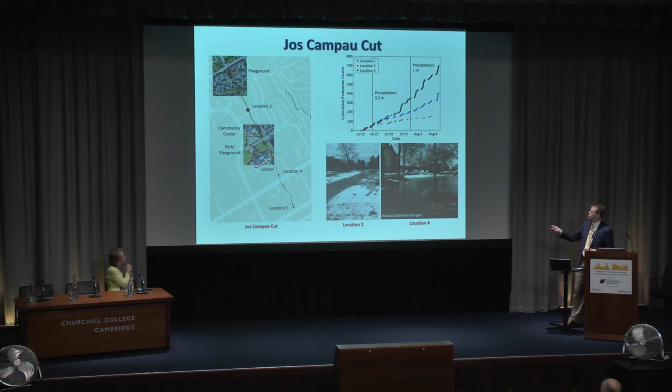We also look at things like air quality - how does air quality correlate to use of these public spaces? That's another area of concern for these students because of the high rate of asthma many of them see in Southwest Detroit. These are measures looking at nitrogen oxide, sulfur oxide, and ozone, the three major air pollutants, including particulate matter, which can trigger asthmatic conditions or challenge oxygen uptake with high concentrations of ozone in the air.

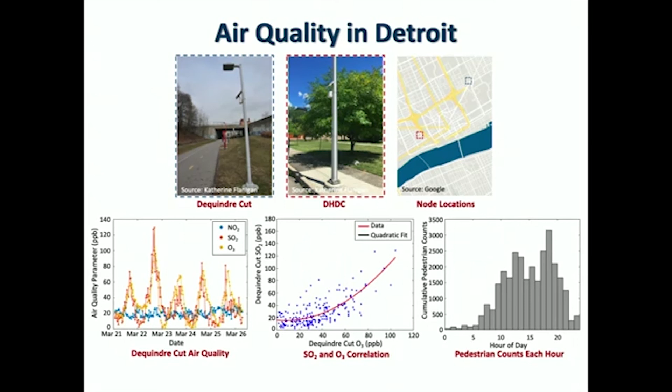What's interesting is that these peak measures of air pollutants occur at the peak times when the park is in greater use. That's one of the potential uses of the data: to inform individuals of air quality indicators before their peak use.

So just some parting remarks. We've seen a continual evolution in the smart space, beginning with smart monitoring, smart control. Today we're seeing a lot of work in the cyber-physical domain, but that's really maturing into a more exciting space that includes social and resource flows - essentially the smart city space.

I highlighted two applications in this talk. One was data-driven decision-making for assets based on monitoring data, a primary concern for most cities dealing with how to manage their infrastructure with smaller and smaller resources. That's one of the reasons we're also looking at financing mechanisms through our Center for Smart Infrastructure Finance to address that.

Some of our ongoing work: we continue to work with Detroit on our urban sensor network deployment. We have about 30 sensors deployed in the city, and we're trying to increase that number through our programs with our students. We've been looking more at continuous and discrete system modeling of the social dynamics, and we apply a lot of computer vision methods there. Detroit has a pretty extensive security camera network in many of its park spaces that we're using to identify park usage through computer vision methods, using the same tools I use to identify trucks.

We're also working with Peter Adriaens, who's here today, on private financing models for infrastructure investment based on performance-based financial vehicles like performance-based municipal bonds. If you're going to have performance-based municipal bonds, you have to be able to quantify the performance. So we're currently looking at linking a lot of our health monitoring data to actually drive a lot of those particular metrics.